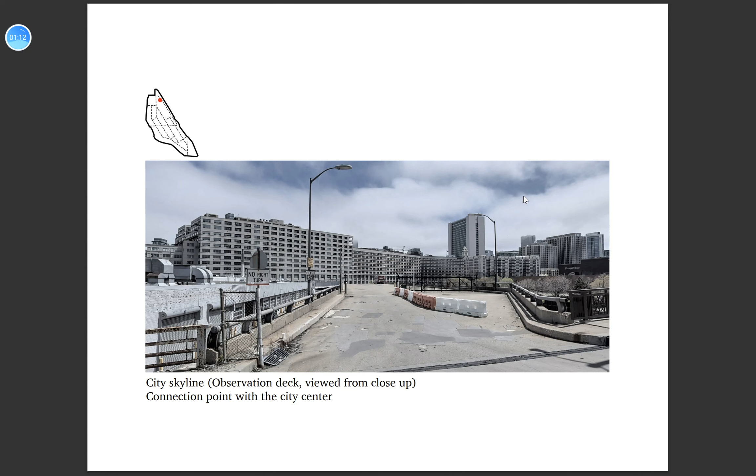The space of Goose Island has rich potential, with unique spatial characteristics such as abandoned railway, city skyline, natural scenery, and scale contrast that can be harnessed to enrich the spatial experience and perception of the area, presenting an ideal canvas for a creative and cultural reawakening.

This current status leads to my goals, which is to create a blend between Goose Island's historical identity and Chicago's vibrant urban vibe.

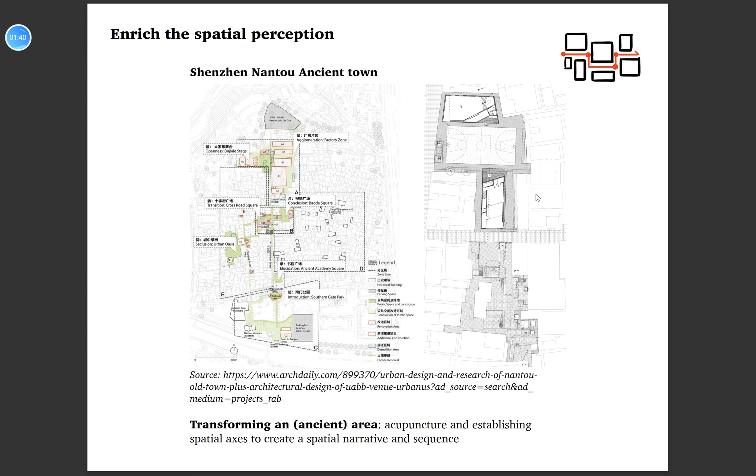Drawing parallels from projects worldwide, we can envision Goose Island's transformation. For instance, spatial narrative techniques from Shenzhen Nantou ancient town, the incorporation of historical murals of Park and Play in Copenhagen, and fusion of old and new elements.

From Sao Paulo State Museum of Art. So here I also get a set of renovation strategies to enrich spatial perception and to link past and future.

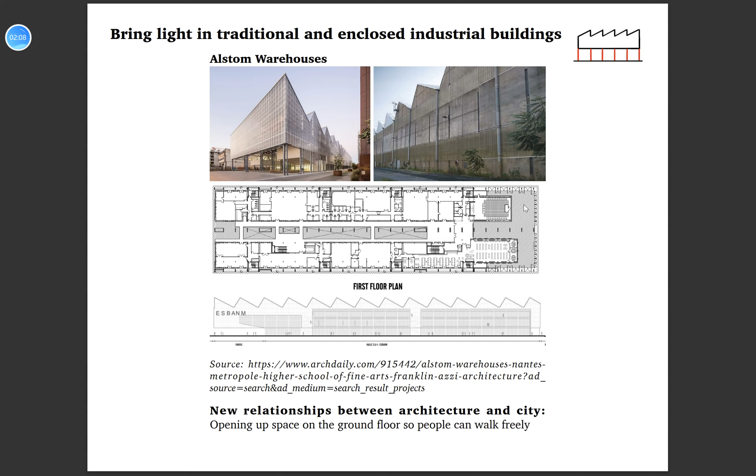However, this is not enough to fulfill the third goal, which is my major goal. So I try to deepen it further by linking Chicago's urban context. First, I focus on skyscrapers.

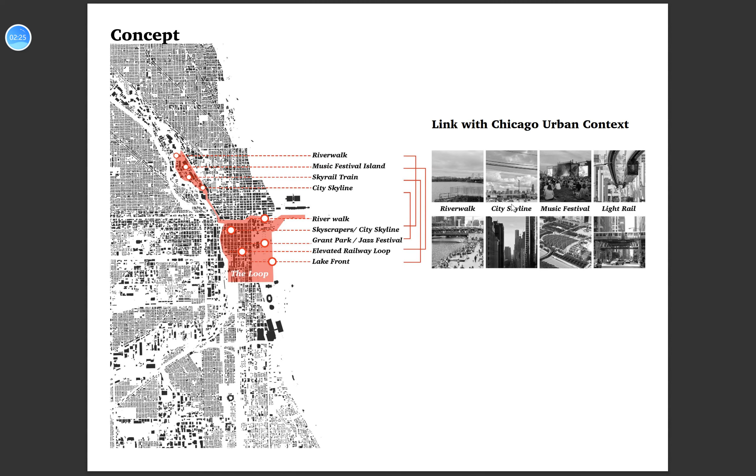From an article talking about Koolhaas, it states that there are two opposite definitions of the skyscraper: one is a needle with no interior and maximum physical impact, while a globe has maximum interior but minimum physical impact. Also in his book called Delirious New York, he states that a skyscraper is an instrument for the unlimited creation of new urban sites within a single location.

Inspired by these, my concept involves redefining Goose Island as a horizontal skyscraper system. Unlike traditional skyscrapers with vertical layering, it enhances spatial creation through lateral transitions, offering diverse perspectives and interactions.

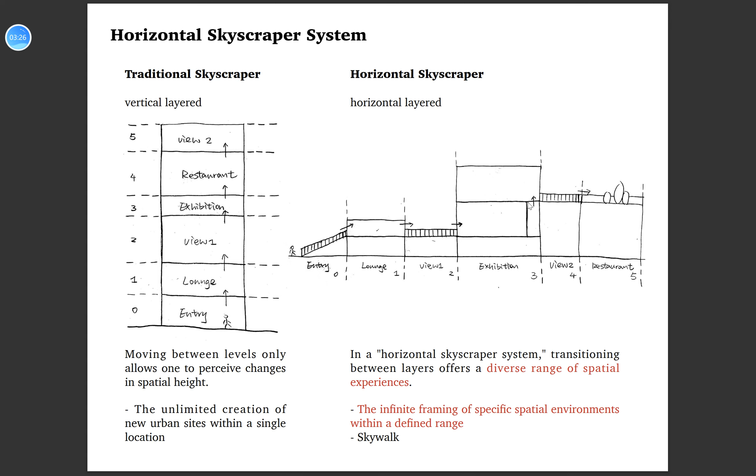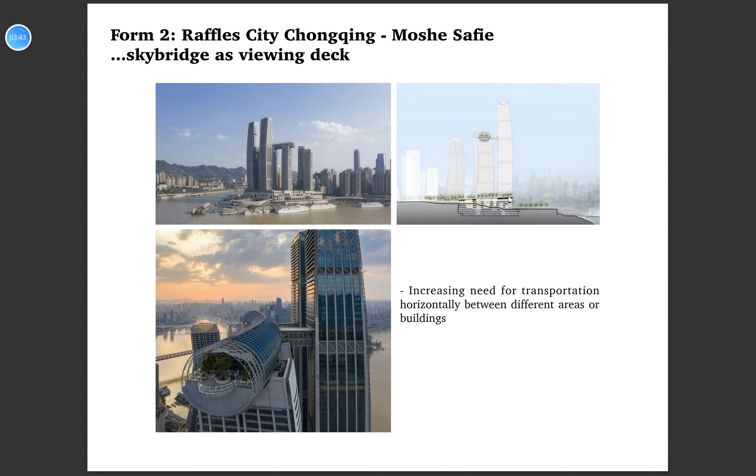Relevant practices also appear as different forms of horizontal skyscrapers: Form 1 is lateral traffic in the air, Form 2 is a sky bridge as viewing deck, Form 3 is to reroute.

Secondly, I focus on jazz. Jazz is continually evolving through time and has an intricate relationship with community, activism, and cultural identity. But the essence is always collective improvisation, which means a performance that includes multiple people at once.

I try to include this into my design by giving multiple choices of evacuation and transport routes to the audience so they can choose according to their preferences, thus forming different flows of people.

In conclusion of my concept, my idea is to transform Goose Island into a music festival site with various improvisational routes, which are mainly connections between different buildings like ramps, observation decks, etc.

To make this idea more feasible, effective crowd management is crucial for safety, environment, and enjoyment. I will employ strategies to organize the crowd.

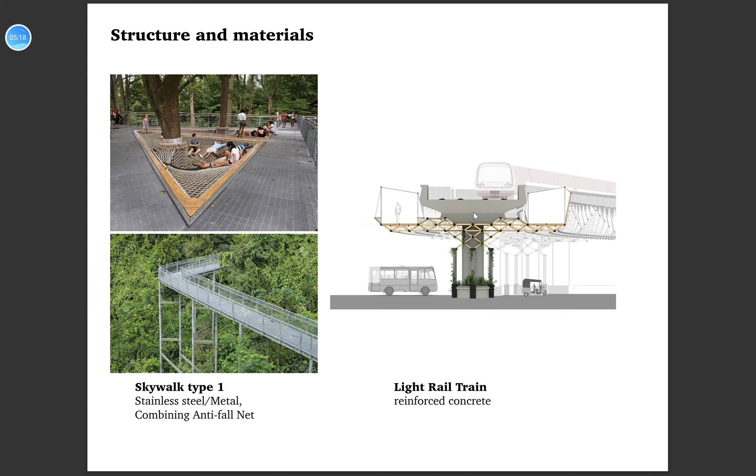The use of durable materials like stainless steel, reinforced concrete, and distressed colored steel will also enhance aesthetic aspects and link with Chicago's identity.

My design proposal consists of several key steps. Step 1 is clearing out unusable buildings and parking lots to free up space.

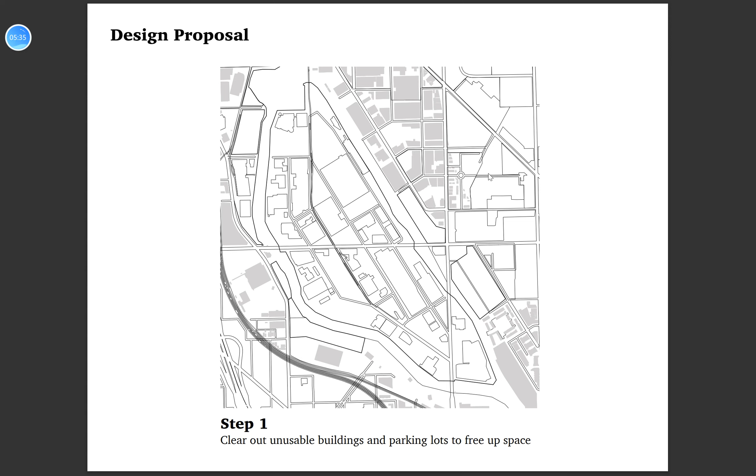Step 2 is to study renowned festival plans to form the rule, which leads to my basic layout. Step 3 is to select the appropriate buildings to transform into stages.

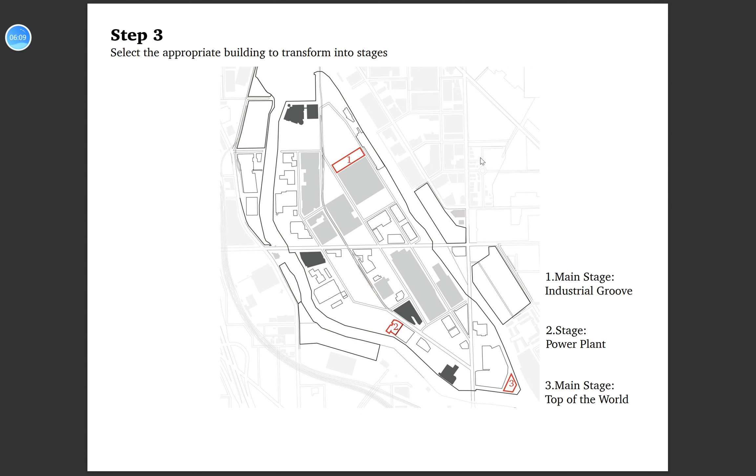Here I chose three and gave them names according to spatial characteristics, like the first main stage is called Industrial Groove, while the third main stage is called Top of the World.

Step 4 is to apply the strategies I've got, as I mentioned before. Step 5, which is also the heart of my design, is to add improvised routes.

Here you can see I have 7 different routes for people, each with a name. Route 1 is called Lake View, and Route 4 is called Back to the Future, because it's the only fast rail train on the island connecting the upper part and lower part of the island.

Route 7 is called Above Grass, because the route brings people closer to nature and also directly connects them to the camping site across the river.

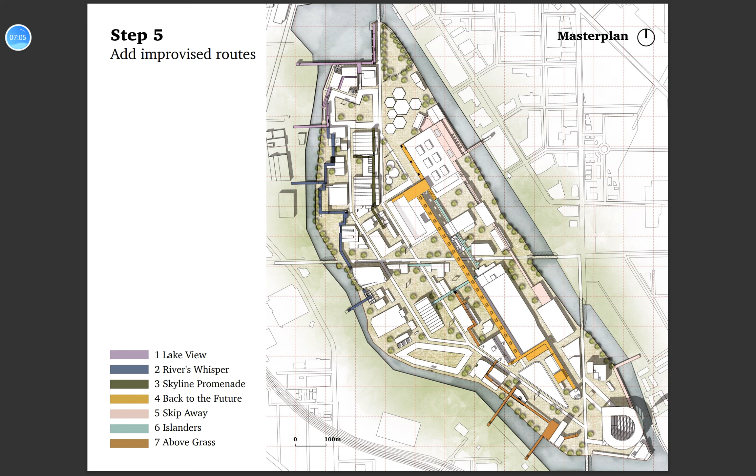Here I have different axonometric views, like this one. The blue dotted line shows the possible routes and pathways for people, while the blue dot shows the possible exits for people to choose.

For example, if people are coming from the upper side of the island, they go along this bridge to enter the island, then climb up the stairs and walk along these pathways above the ground. When they arrive here, they can choose to go down directly into these squares.

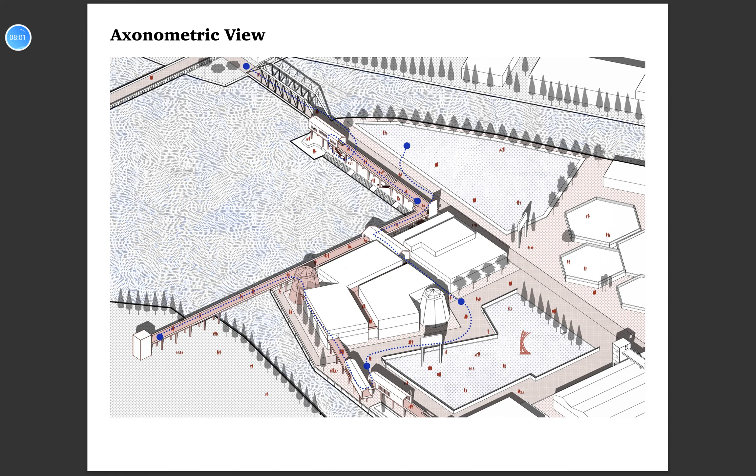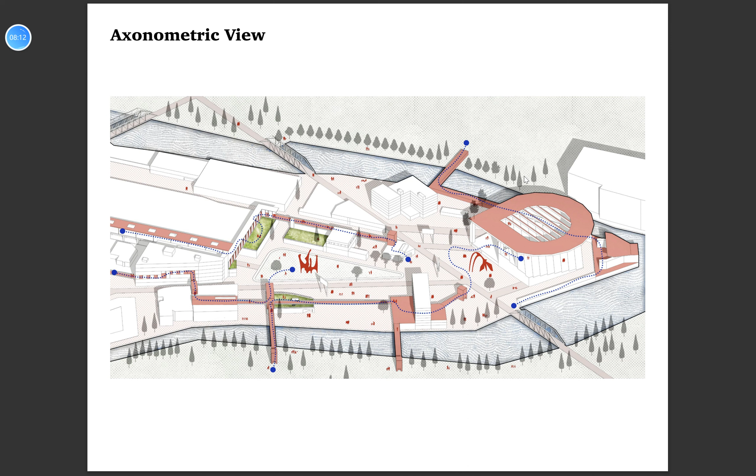Here's an axonometric view of the lower part of Goose Island. On the right side is the biggest stage on the island.

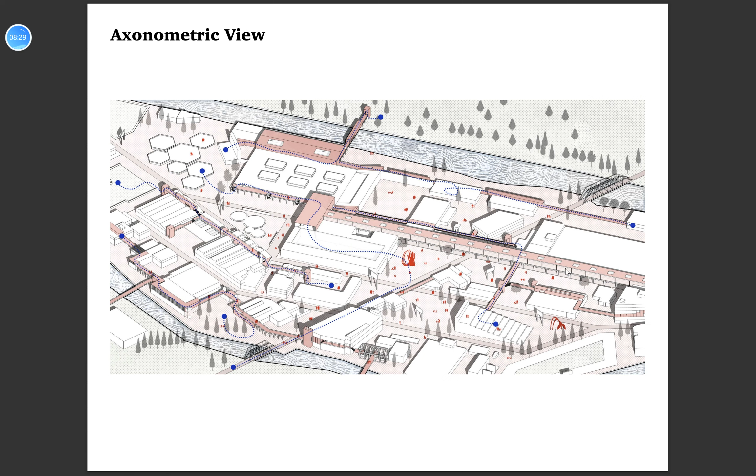And this is the third one, which is more about the middle part of Goose Island. All the red and pink places are the routes.

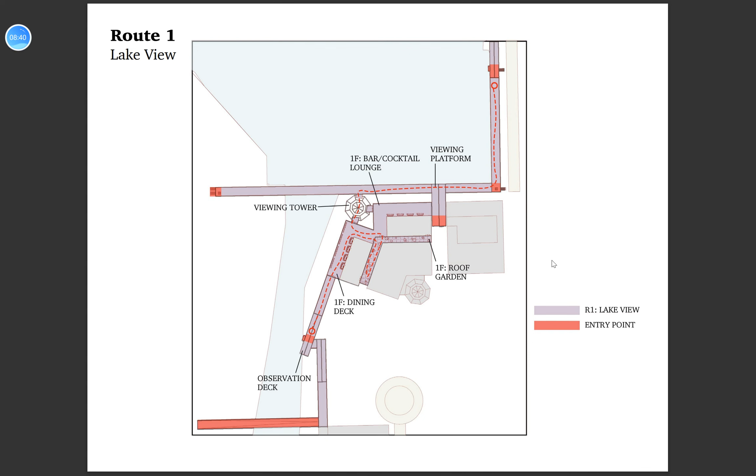Here is a more specific plan for Route 1, and a perspective view.

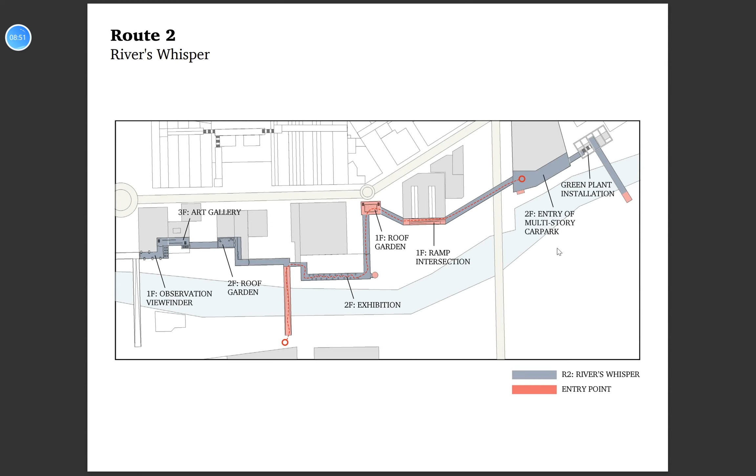It connects directly to the stages, so the artist can directly go away and leave the place without disturbance from fans.

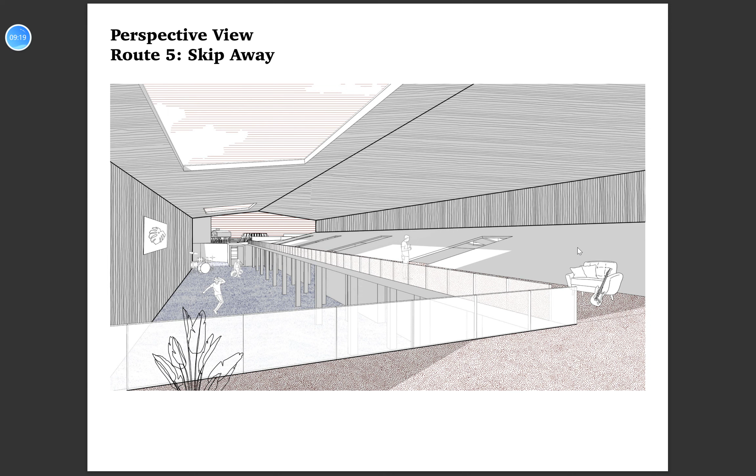And a perspective view for Route 4, Back to the Future. Here you can see the dramatic scale contrast.